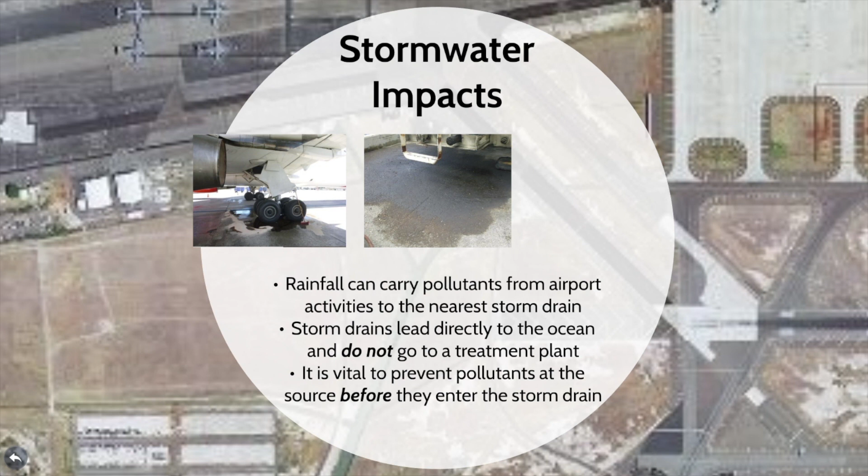Stormwater pollution can occur when rain comes into contact with pollutants on the ground. Pollutants may come from many sources, some of which include aircraft or vehicle leaks, material or chemical spills, lavatory waste, excess dirt and debris on a facility, or trash. As the stormwater sheet flows over the ground, these pollutants are picked up and have the potential to be carried away into the storm drain system.

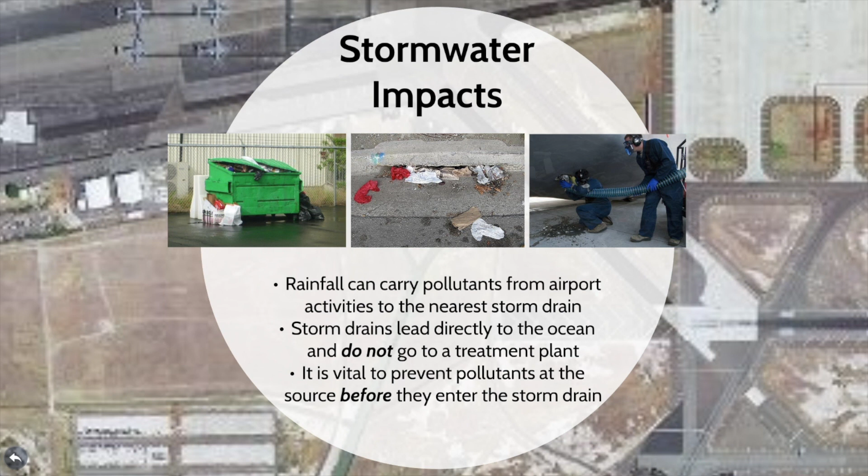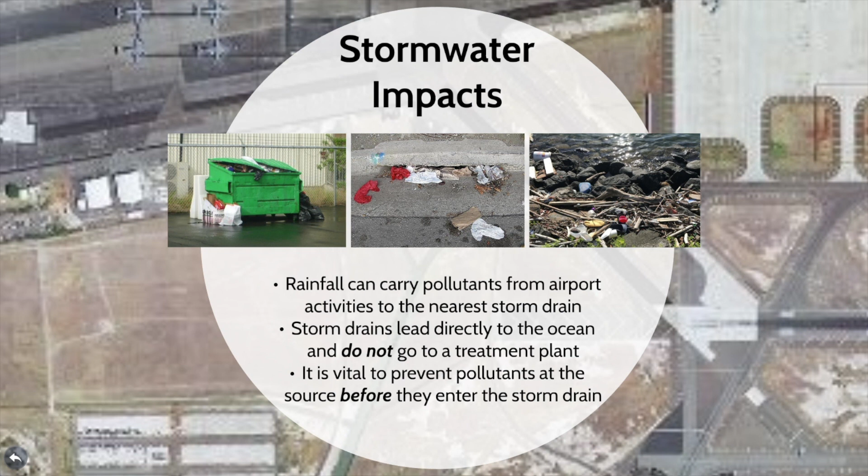Storm drain systems consist of various structures that include drain inlets, manholes, underground pipelines, and canals. All storm drain systems eventually lead and discharge directly into the ocean and do not go to a treatment plant as opposed to a sanitary sewer system. This stresses the importance of preventing pollutants at the source before they can enter the storm drain and potentially discharge into our waterways and oceans.

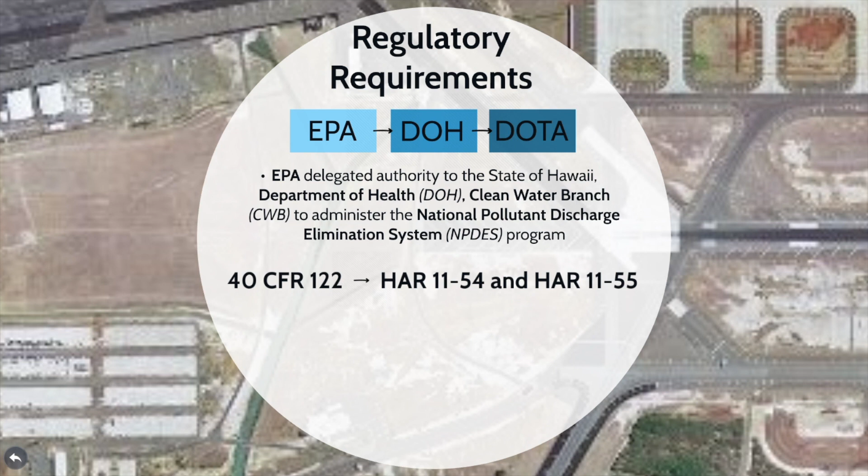The Environmental Protection Agency has delegated authority to the State of Hawaii Department of Health, the DOH, Clean Water Branch, for administering the National Pollutant Discharge Elimination System, or NPDES program. Specifically, the NPDES is a requirement of the Clean Water Act under Code of Federal Regulations, Title 40, Chapter 122, as well as Hawaii Administrative Rules 11-54 and 11-55. DOH issues NPDES permits to the DOTA that authorizes stormwater runoff discharges from the Small Municipal Storm Sewer Systems, or MS4.

An MS4 is a system designed or used to convey stormwater owned by state, city, or public entity that discharges to the waters of the U.S. The MS4 is not part of a sewage treatment plant or a combined sewer. Additionally, DOH issues NPDES permits for stormwater discharges related to industrial activities at base yard and tenant facilities.

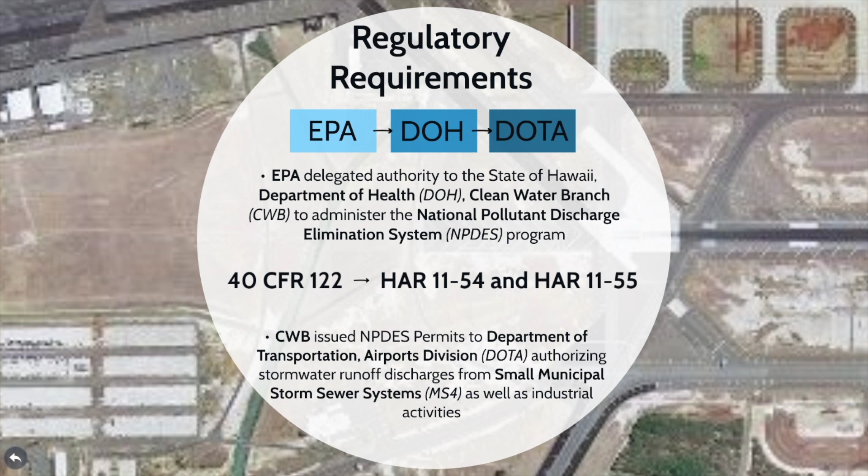The NPDES permit, discussed in the previous slide, governs airport operations and requirements for tenants. Implementation of BMPs are the primary tool that the airport uses to meet their requirements and must be implemented in accordance with the two small MS4 permits. The Daniel K. Inouye International Airport, also known as Honolulu International Airport, has an individual NPDES permit for its small MS4. One of the requirements of the NPDES permit is to develop a stormwater management program plan, or a SWMP. The HNL SWMP includes BMPs that are required to be implemented at the airport.

Kahului Airport, on the other hand, has a general permit for its small MS4. Kahului Airport also developed a SWMP, including BMPs that are required to be implemented at that airport. Additionally, Kahului, Lihue, and Molokai airports have general NPDES permits for industrial activities conducted at their base yards. BMPs must also be implemented in accordance with the Inspection and Enforcement Manual. For more information and links to these documents, please visit the airport website shown below.

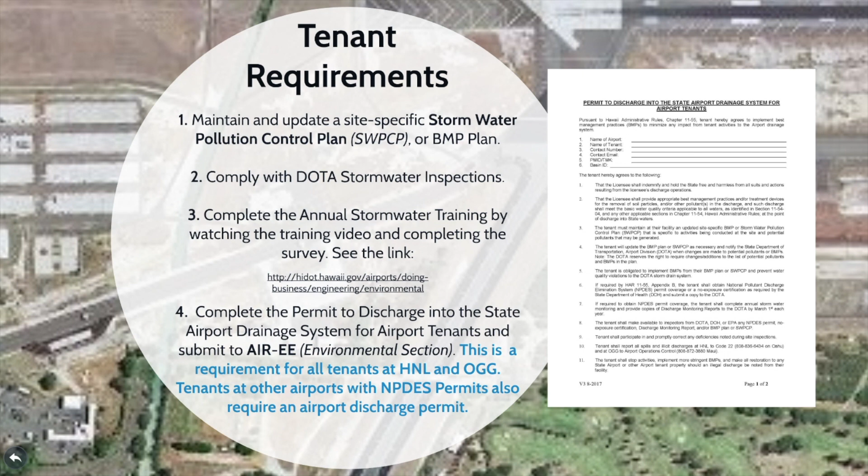In addition to implementing the BMPs, tenants are required to maintain and update a site-specific stormwater pollution control plan known as a SWPCP or a BMP plan on site, comply with the DOTA stormwater inspections that are conducted by the DOTA Environmental section and their consultants, complete the annual stormwater training by watching this training video and completing the survey and roster. Lastly, all tenants at the airport must complete the DOTA Stormwater Runoff Discharge Permit and submit to the DOTA Environmental section. An example of the DOTA discharge permit is here. Please keep in mind that these permits must be kept on file at all times.

Additional tenant requirements include knowing your Standard Industrial Classification Code, or SIC code. All facilities with regulated SIC codes that meet the definition of industrial are required to obtain an NPDES permit. You may verify your SIC codes at the link below. If your facility has a regulated SIC code, but the industrial activities and materials are not exposed to stormwater, you may qualify for a conditional no exposure exclusion, a CNEE. Tenants are required to comply with their NPDES permit requirements from DOH, including but not limited to developing and maintaining an SWPCP, conducting inspections, monitoring, etc.

Another requirement of the airport's NPDES permit is to implement BMPs at construction sites. Details of the airport's Environmental Construction Management Program may be found in SWMPP Section C. A separate training presentation is available at the airport website shown here.

If you are planning construction activities at your facility, you must comply with the following procedures. Obtain DOTA's approval for the construction project. A construction plan review is required to ensure that BMPs are adequate for the project, the proper permits have been obtained, and post-construction BMPs have been considered for projects over 1 acre.

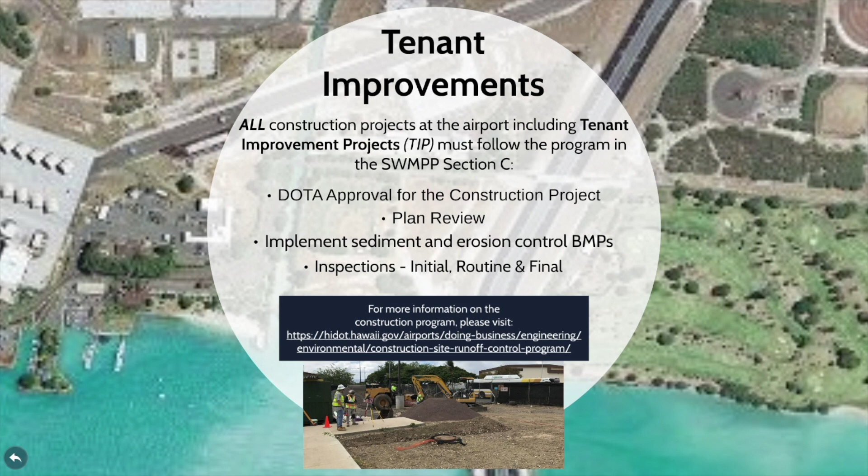Throughout the duration of the project, the DOTA Environmental Section will conduct routine inspections to ensure that BMPs are maintained. When violations are noted, DOTA can issue enforcement actions and increase the frequency of inspections. Consultation with the DOTA Environmental Section is required if construction is planned for your facility.

The most effective way to control pollutants is by implementing BMPs. According to the EPA, BMPs are schedules of activities, prohibitions of practices, maintenance procedures, and management practices used to prevent or reduce pollution of waters in the U.S.

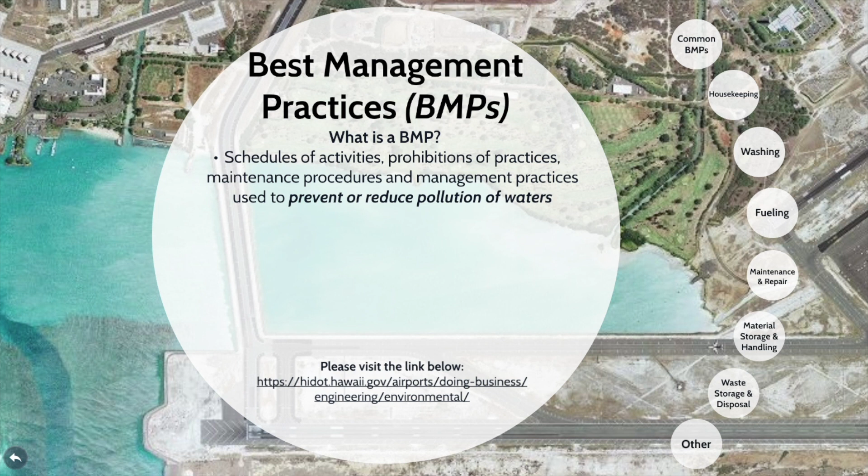Examples of BMPs include picking up trash, storing possible contaminants indoors and undercover, inspecting vehicles for leaks, and many more that will be the focus of today's training.

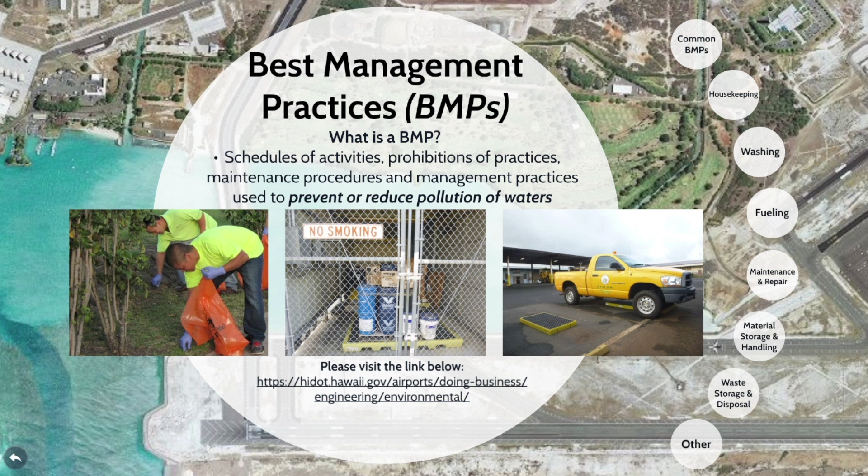The following references include BMPs for your operations. Please visit the DOTA website to review these documents.

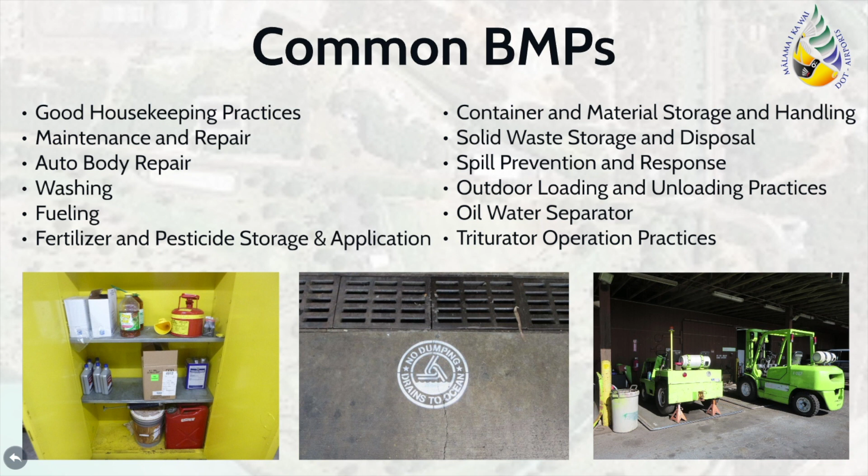The first thing to do when selecting BMPs is to consider all of the activities conducted at your facility that may affect the stormwater runoff. The BMPs applicable to airport activities generally fall under the categories listed.

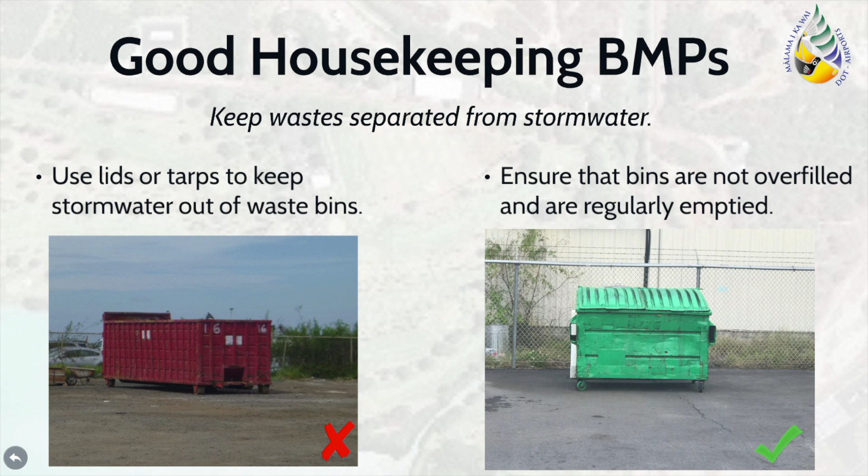The applicable BMP in these situations is to first regularly empty bins and dumpsters before they are overfilled, and to always cover dumpsters after they are done being used to prevent contact with rain.

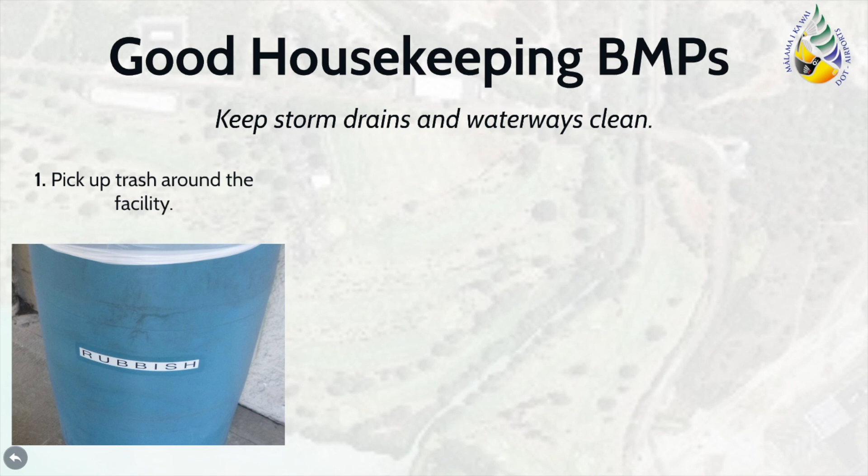Good housekeeping BMPs also ensure that facility storm drains and associated waterways are consistently kept clean. Conduct regular inspections of the facility and dispose of any trash and accumulated debris properly in the designated rubbish bins. If storm drains are particularly close to facility operations, such as maintenance or fueling, you may want to consider installing a treatment device.

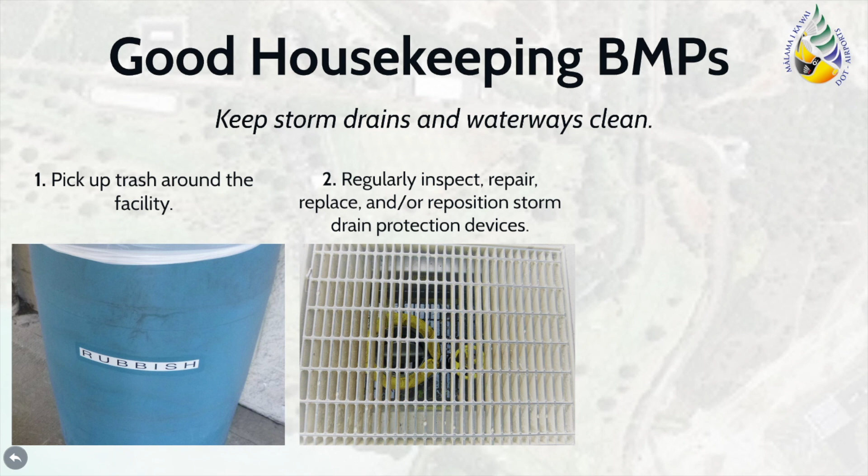Such as the safeguard pictured here. Ensure that if such devices are installed, that they are also properly maintained. Lastly, always ensure that trash and debris near storm drains or associated waterways are cleaned promptly before they enter the storm drainage system.

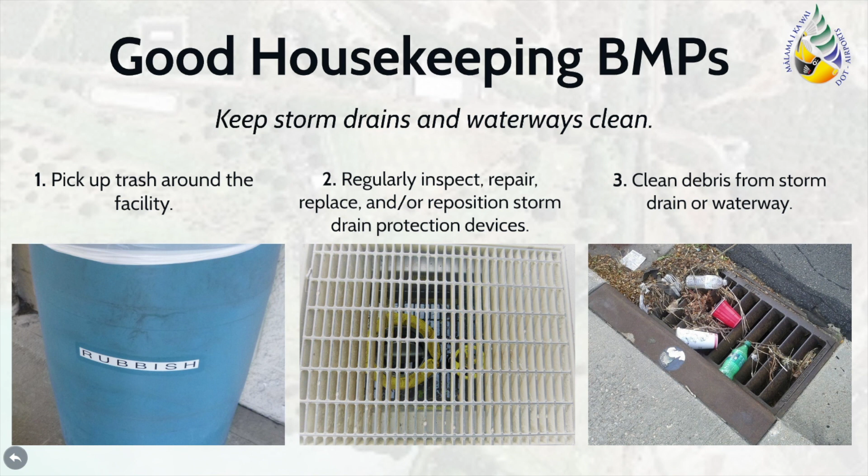As part of the regular facility cleanup mentioned previously, sediment and other debris should never be removed utilizing a water hose. Wash water from hosing down the facility may impact the receiving waters with potential pollutants and contaminants that they carry.

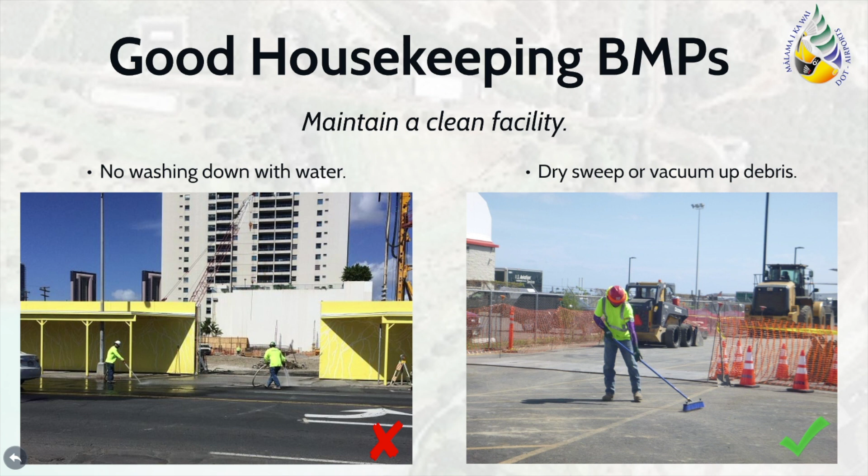Ensure that your facility is always swept or vacuumed, as the fine sediment can easily be carried away in the stormwater runoff and present a hazard to Hawaii's coral reef ecosystems. Good housekeeping BMPs vary based on activities that each facility conducts, so be proactive and consider how you can do your part in protecting our waters.

If you notice that your storm drains are filling with debris, ensure that they are regularly cleaned. Ensure that personnel and workers are knowledgeable of facility BMPs, as they will be asked during inspections whether they have had training and which BMPs they are responsible for implementing. Lastly, conduct your own inspections of BMPs to ensure that they are effective and best suit your facility's operations.

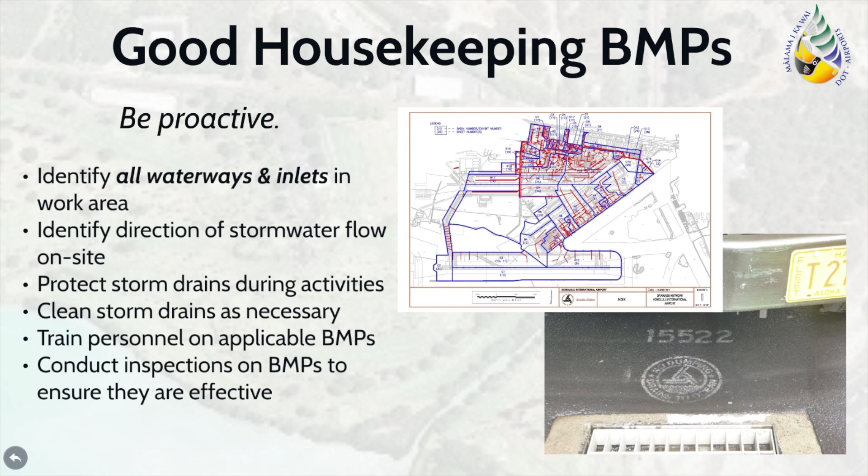This is the drainage network map of Honolulu International Airport that shows locations of inlets, manholes, pipes, and drainage canals. Please be sure to familiarize yourself with the drainage map at your airport and identify where the storm drains on your site lead to, as the waters flow untreated to our natural waterways and oceans.

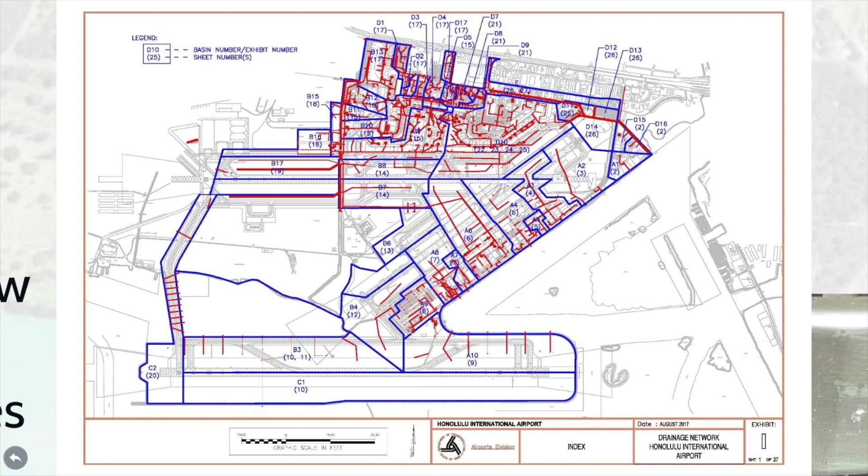The next category of BMPs are for vehicle, equipment, and aircraft washing. Washing activities should be conducted only at a designated wash rack that contains an oil-water separator or other treatment system where it will be treated prior to being discharged into the sanitary sewer. Washing of vehicles in undesignated areas is not permitted.

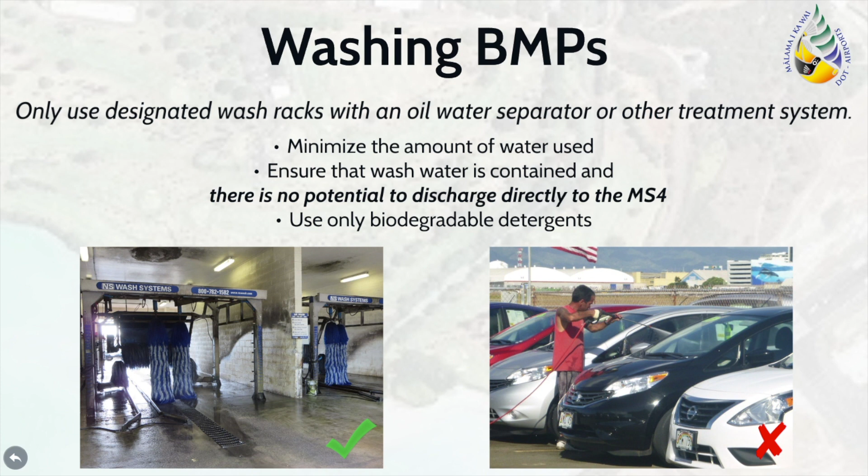When washing in a designated area, attempt to use as little water as possible to accomplish the task and ensure that it is contained within the wash rack. Any water that is not contained within the wash rack may be discharged to the storm drain system. Discharges often occur from wash racks when wet vehicles and equipment leave the contained washing area before allowing the equipment to dry prior to exiting. Please note that any discharge from washing activities into the MS4 is considered an illicit discharge, and DOTA will be required to escalate enforcement.

In areas where a designated wash rack is not available, DOTA approval is required to conduct washing. DOTA approval is required for the implementation of alternative BMPs to completely contain the wash water and dispose of it properly. The goal of these alternative BMPs is to prevent the wash water with potential pollutants such as soap, dirt, metals, and oils from entering the storm drain system.

This can be effectively achieved by containing the wash water. These systems may utilize a wet vac to completely contain and remove the wash water as the vehicle, equipment, or aircraft is being washed. Other methods include using the bucket and sponge method, which allows for the bulk of wash water to be contained inside the wash bucket. Once washing is complete, the contents of the wash bucket can be disposed of in the sanitary sewer.

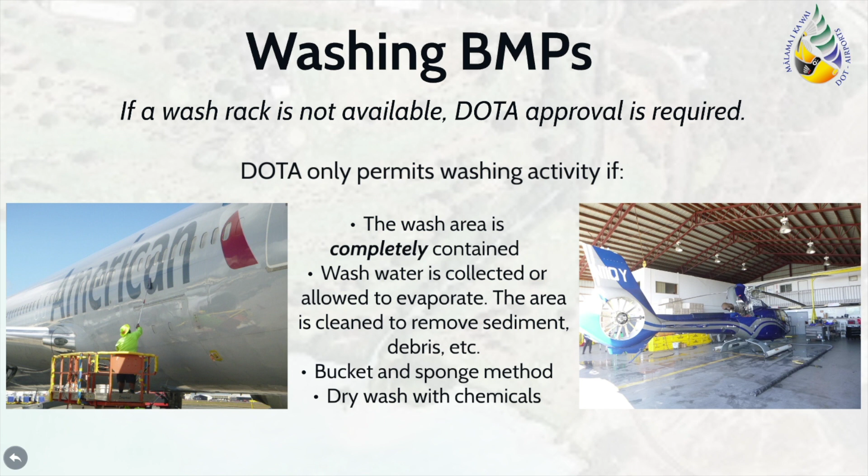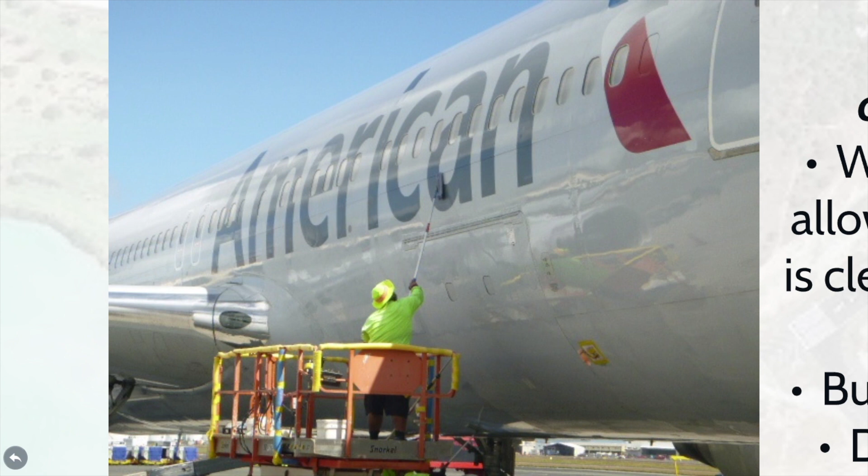Dry washing using a chemical and rag, as seen in this example, is used to wipe down when washing is required. This method does not involve water, which means that there is no risk of discharging to the storm drain. Here's an example of BMP implemented at a tenant space that allows for proper collection and disposal of the wash water.

Fueling BMPs consider regulations from the NPDES program, as well as the Spill Prevention Control and Countermeasures, or SPCC program. Tenants are required to develop and implement an SPCC plan when aggregate capacity of the above-ground oil storage exceeds 1,320 U.S. gallons, or when the buried storage capacity exceeds 42,000 U.S. gallons. Note that oil storage at your facility does not include containers less than 55 gallons.

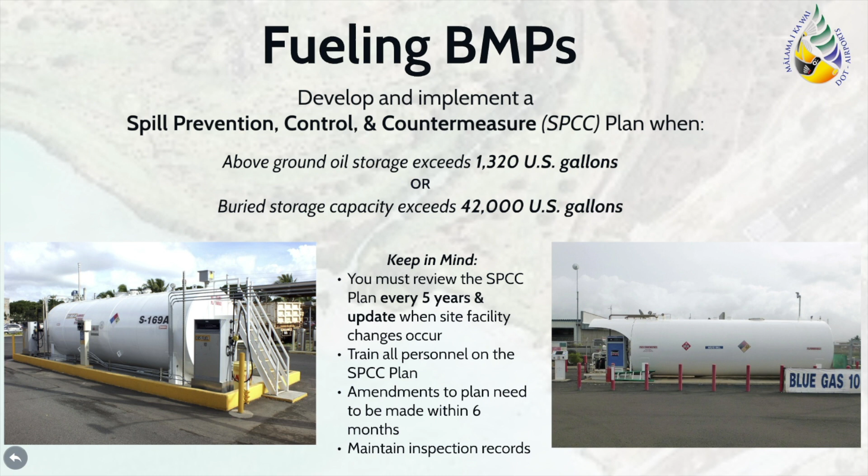Also keep in mind, if you have an SPCC plan, it must be reviewed every 5 years and updated when changes at your facility occur, such as changes in personnel, tank capacity, or site layout. All personnel must be trained on the SPCC plan according to the frequency written in the plan. Amendments to the plan must be made within 6 months of when such changes occur. In addition, inspectors will review to ensure that the routine inspection records of the tanks are maintained on site for a minimum of 3 years, or in accordance with the SPCC plan.

Operational fueling BMPs that should be implemented include inspecting hoses and nozzles for any cracks prior to use, thereby preventing releases. Those involved in filling operations should also stay vigilant in the event that any releases are readily and correctly identified. Ensure that the tank is not topped off, as this can increase the chances of oil spilling onto the ground and becoming a potential pollutant.

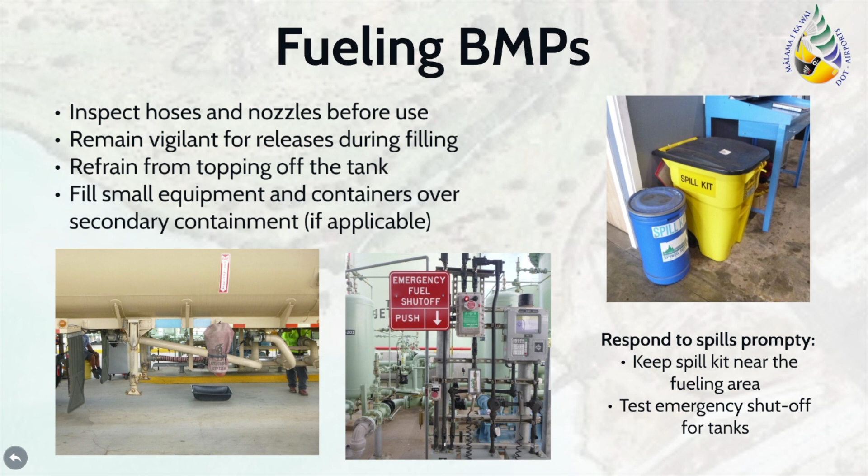It is important to respond to any spills that may occur promptly. It is a good rule of thumb to keep spill kits near the fueling area and to routinely test the emergency shutoff for tanks.

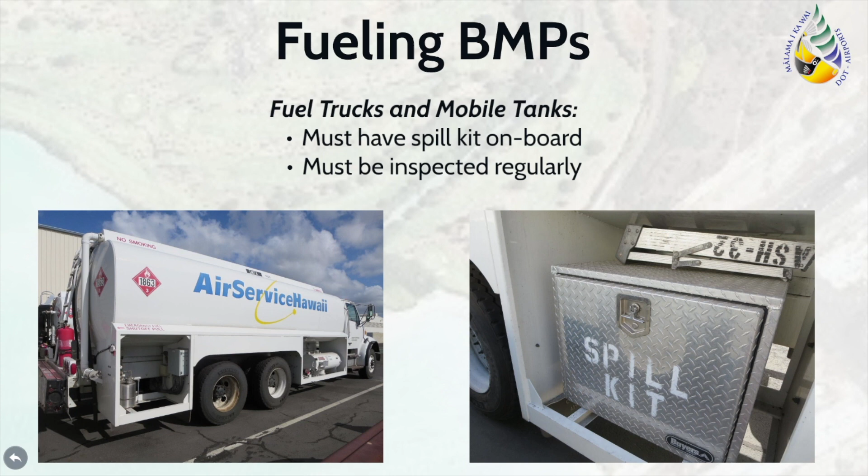Fuel trucks are regularly used at the airport for fueling aircraft. These trucks must have a spill kit on board, and personnel must be well trained in responding to spills that may occur from these activities.

This next category of BMPs is specifically for auto body shops. There are many potential contaminants associated with auto body work, such as sanding dust, paint, VOCs, etc. Therefore, the first BMP is to ensure that these activities are conducted indoors or undercover so that these potential pollutants are not impacting the stormwater runoff.

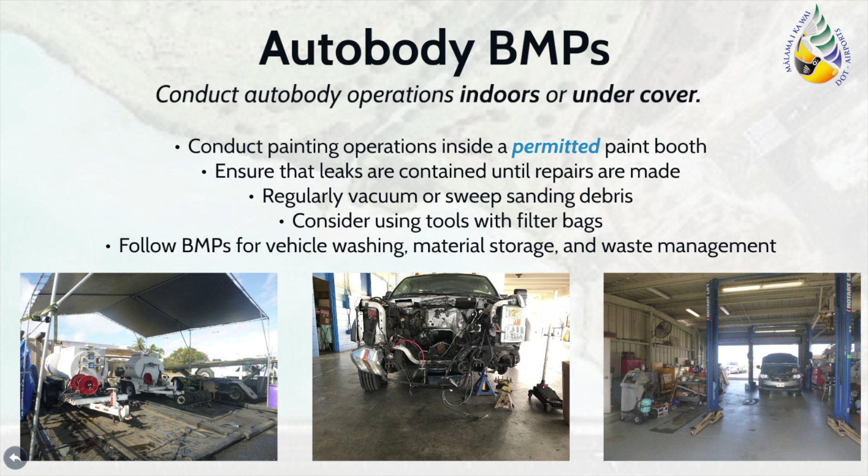Often, vehicles that require auto body work may be damaged, which is why it is vital to inspect the vehicle first and place drip pans beneath the vehicle to capture leaks until repairs are completed. A particular threat to stormwater from auto body work is the generation of dust from sanding operations. Due to its small size, the sanding dust is easily carried away, so be sure to regularly sweep and vacuum.

This BMP applies to maintenance and repair of aircraft, vehicles, and equipment. It is important to keep equipment in good condition so that equipment fluids are not released into the environment. Conduct regular aircraft, vehicle, and equipment inspections to check for leaks and repair as necessary.

Keep all maintenance records on site. If a leak cannot be repaired immediately, use a drip pan of sufficient capacity to contain the leaking fluid and later dispose of it properly. It is required that drip pans, especially those stored outdoors, are regularly cleaned to empty the contents and any rainwater accumulation. Please note that leaking aircraft, vehicles, and equipment are not allowed to be parked overnight on airport common use areas without prior approval from the airport's district manager and appropriate drainage controls.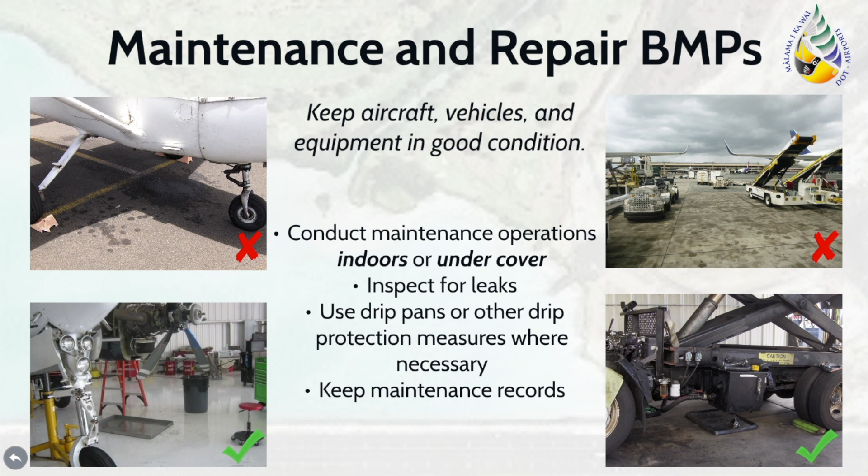Salvage equipment includes those items that are no longer working and need to be disposed of. When storing salvage equipment, ensure that the following proper BMPs are implemented. Remove fluids and batteries so that releases will not occur to the environment. Additionally, if vehicles or equipment begin to rust, dispose or place in a covered area that will not impact stormwater runoff.

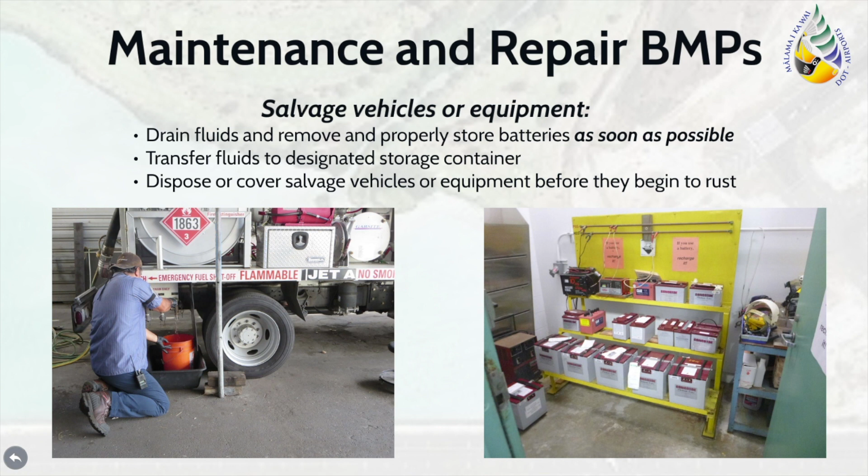All maintenance activities are required to be conducted in their designated areas where they will not have an impact on the stormwater runoff. Maintenance areas should also be located away from storm drains so that responders have the opportunity to clean spills before it discharges to the drainage system. Ensure that fluids removed from the vehicles and equipment are transferred to a designated storage container promptly. The storage containers must be labeled, closed, and placed within secondary containment measures.

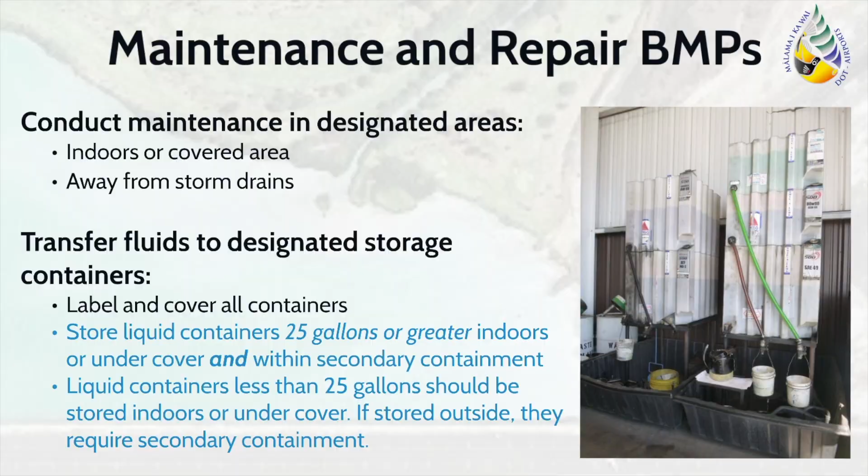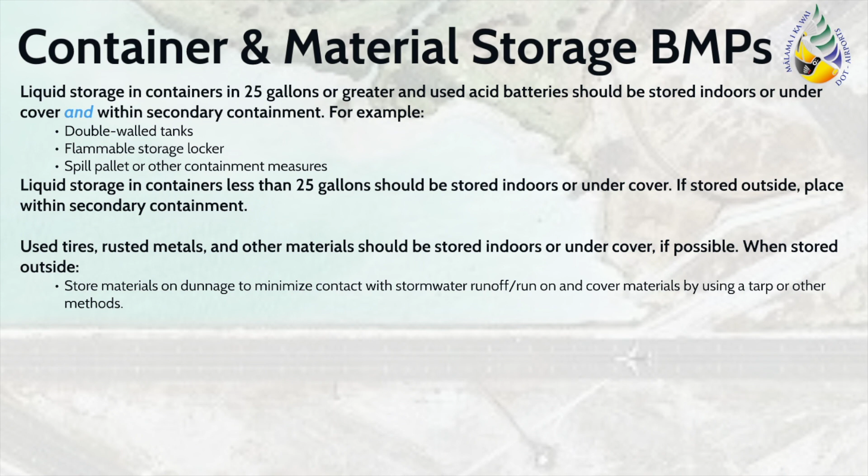Materials stored at your facility may impact stormwater runoff and therefore are required to be kept indoors or in a covered area. Keep in mind that secondary containment is required for liquids and batteries. Examples of secondary containment measures include double-walled tanks, flammable storage lockers, and spill pallets or other containment measures. If materials must be stored outdoors, protect them from stormwater runoff by placing them on dunnage and by also covering the materials using tarps.

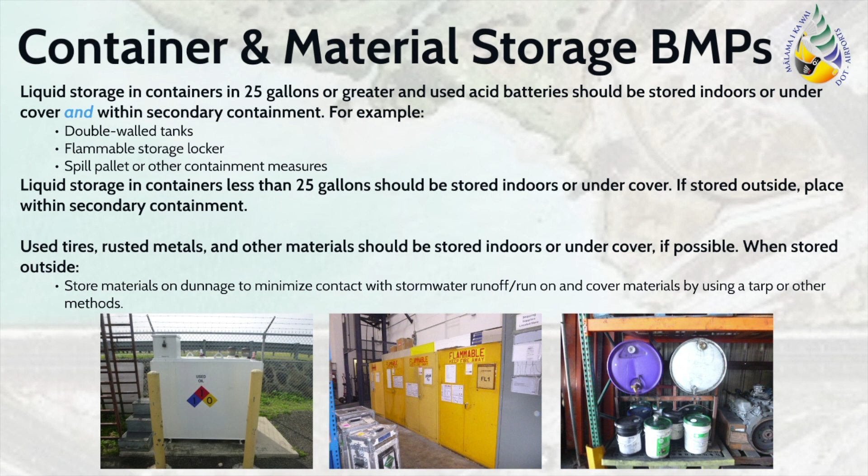The secondary containment for materials must have the capacity to hold the volume of the largest container plus freeboard. Ensure that secondary containment measures are clear of accumulated rainwater or product, since a partially filled secondary containment measure can no longer contain releases. If rainwater accumulates within the containment, it may only be discharged provided that there are no contaminants present. For example, the stormwater in the spill pallet must not have a sheen.

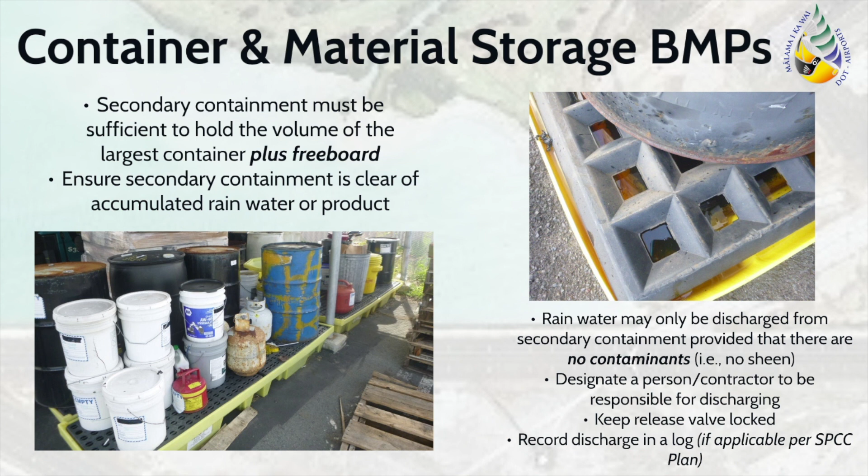Always designate a person to empty the spill pallet, in which the discharge must then be recorded. Please note that if any product is present in the secondary containment, it must not be discharged and is required to be cleaned according to the spill response procedures.

Other material storage BMPs include conducting regular inspections of material storage areas. Ensure that all containers are still in good condition and compatible with the materials stored. Broken or deteriorating containers must be replaced.

Please note that all chemical containers must also be labeled, even if the container is empty. Empty containers must have an empty label. In the picture shown, each of these 55-gallon drums are clearly marked with empty labels.

It is also important to keep and maintain a list of chemicals at the facility, along with the safety data sheets, or SDS. Keeping an inventory will assist in preventing employees from over-purchasing items, and also assist in ensuring that items are utilized prior to their expiration date. Both of these practices will reduce the generation of wastes from material storage. Facilities should also consider alternatives for hazardous chemicals, such as biodegradable solvents.

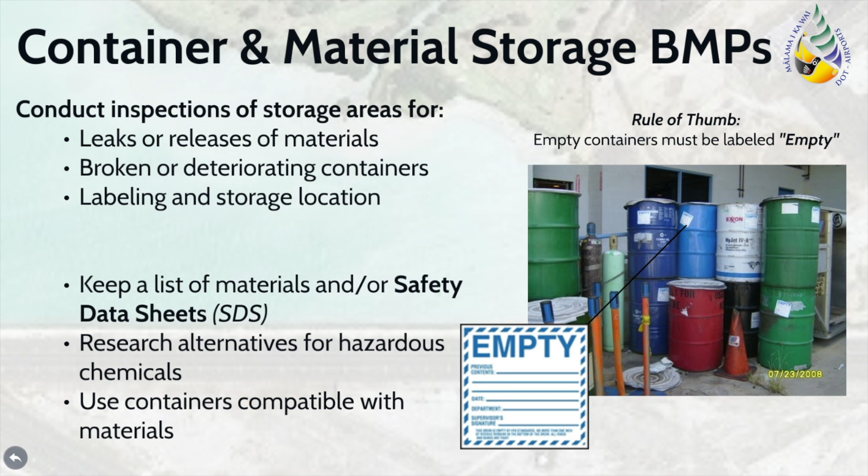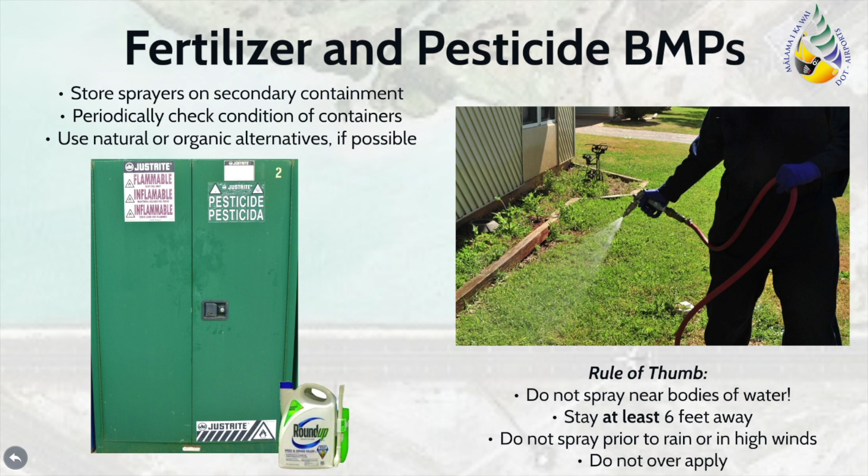Solid waste storage and disposal is a broad topic and may be enforced under many additional regulations other than those described in the NPDES program. Tenants should be aware of those regulations and always follow the more stringent implementation of the regulations if there is a conflict. The list provided here are general BMPs that may be applied to solid waste.

Consider using the entire product prior to disposal. If the container is empty, then there is a reduced chance that it would impact the stormwater runoff. Please keep in mind that the Resource Conservation and Recovery Act, or RCRA's, definition of empty, applicable for containers less than 110 gallons, is less than 1 inch of material remaining.

In addition, it is vital to retain the original label and/or safety data sheet for disposal information, since it will provide specific information about storage and disposal procedures. Also, consider reducing material purchases to only those things that are required for the task, so that fewer potential wastes are generated when excess materials are not used.

Recycle items such as scrap metal whenever it is possible. Inspect waste storage areas to look for releases and to ensure that waste containers are in good condition, closed, and properly labeled.

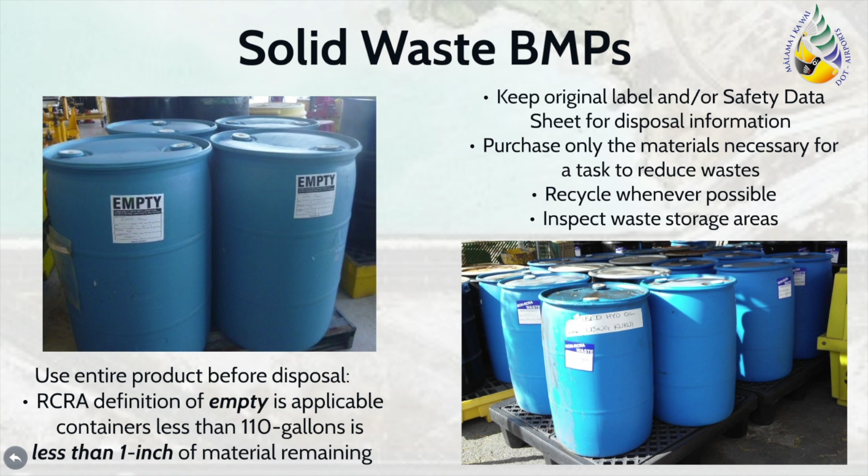Hazardous wastes are another waste category regulated under RCRA. First, determine if the wastes generated at your facility are hazardous, which may be done by referring to 40 CFR 261 for the definition of hazardous waste.

If hazardous wastes are stored at your facility, ensure that the wastes are not mixed. Best management practices for storing hazardous waste include keeping them indoors or under cover, ensuring they are stored within secondary containment if liquid, and labeling them properly with the words hazardous waste and the accumulation start date.

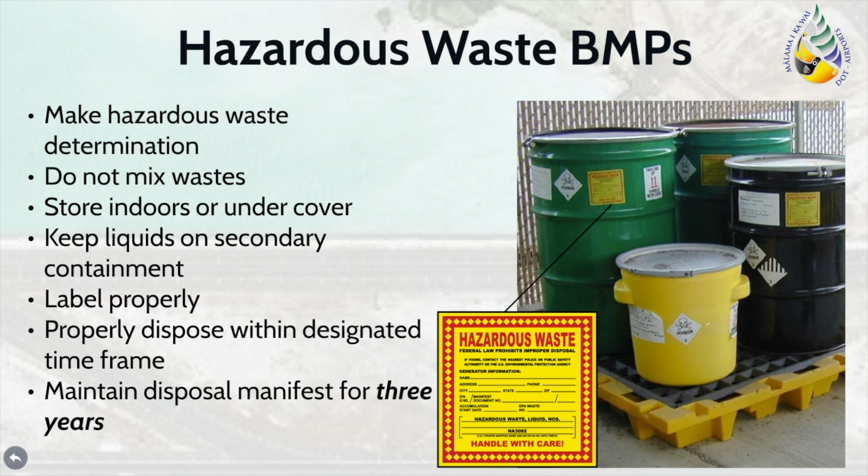Ensure that wastes are disposed within the appropriate timeframes, depending upon the facility generator size, and maintain the disposal manifest for 3 years. Airport inspectors will ask to see copies of these manifests to verify proper waste disposal.

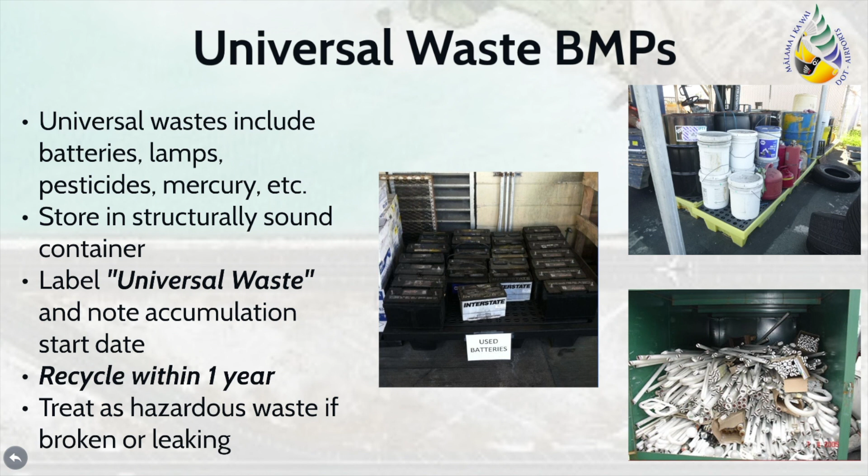Universal waste includes hazardous waste items such as batteries, lamps, pesticides, and any mercury-containing equipment. If any of these universal waste items are stored at your facility, they must be placed in a structurally sound container and labeled with the words universal waste, including the accumulation start date.

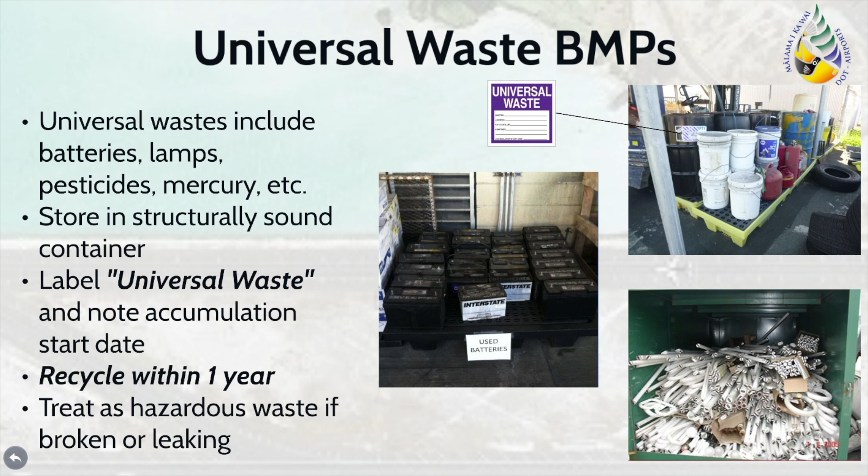These items must be recycled within 1 year, and disposal documentation should be retained. Please note that broken lamps or leaking batteries must be handled as hazardous waste.

Many facilities are equipped with oil-water separators to separate oils from wastewater. Tenants with oil-water separators must maintain an industrial wastewater discharge permit, or IWDP, on site that is issued by the City and County of Honolulu.

The oil-water separator must also be inspected at least semi-annually and cleaned as needed. Oil-water separator maintenance logs must be kept on site and will be reviewed by airport inspectors.

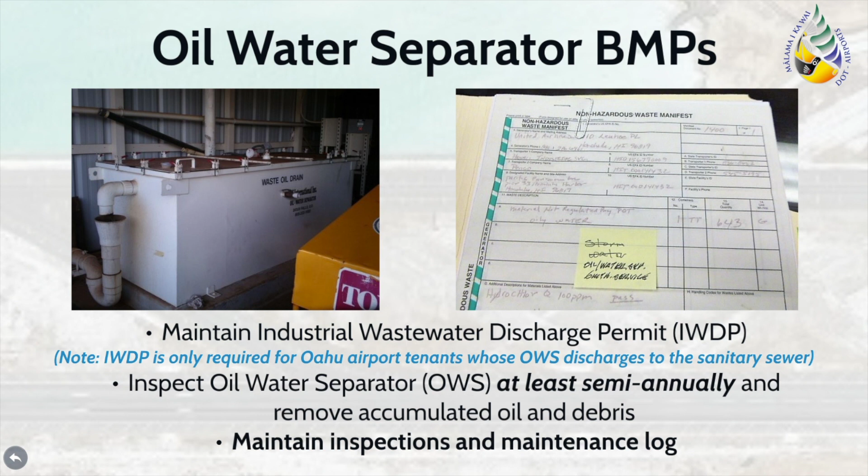Facilities that engage in the servicing of aircraft may also need to implement triturator usage best management practices. Please note that there is a separate triturator training that must be provided to lavatory waste operators. Contact the airport environmental health specialist for a copy of this required training.

In general, when handling lavatory waste, operators should ensure that hose connections are secured and not leaking. Operators should be present during the offloading process to respond to any release that may occur.

While at the triturator, operators are not permitted to wash the exterior of the truck. The triturators are not designed to contain the wash water, and it may run off to the storm drain system.

If a spill does occur while at the triturator, as seen in the picture on the right, ensure that it is cleaned promptly. Spills may be cleaned using a disinfectant, rags, and/or a broom. Please ensure that kitty litter is not used to clean lavatory waste spills, as it may damage the triturator system.

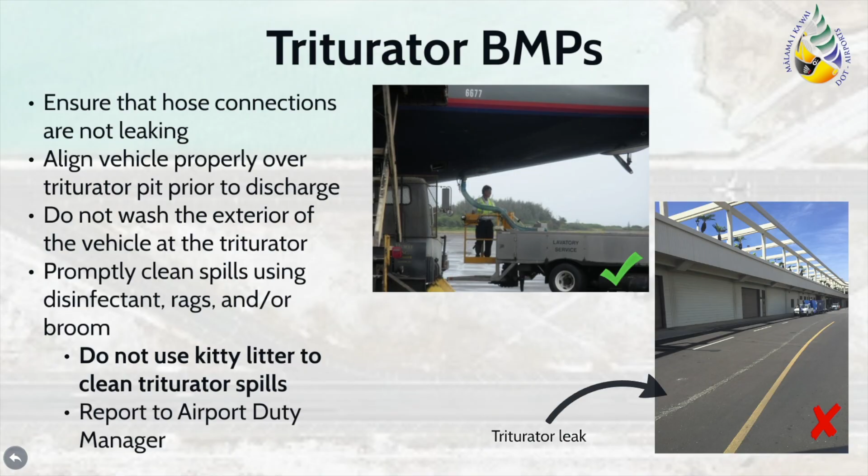Spills are a common way that pollutants are discharged from a facility to the storm drain system. Employees at your facility should be well trained in preventing and responding to spills that may occur, as well as protecting the storm drain system.

Consider running a practice scenario or drill to ensure that employees are prepared for spill response. Additionally, every facility must have a spill kit. The spill kit should contain personal protective equipment, or PPE, for employees to wear while cleaning the spill.

The spill kit should include gloves and goggles, a plastic bag or other container for disposal, non-sparking tools such as a broom, and some type of absorbent. The spill kit should be labeled and located near an area of the facility where spills are likely to occur, such as the fueling or material storage area.

Post emergency phone numbers for employees. Every facility should have a designated person who will ensure that spills are properly cleaned and make the necessary notifications. All spills, no matter the size, should be reported to the airport duty manager.

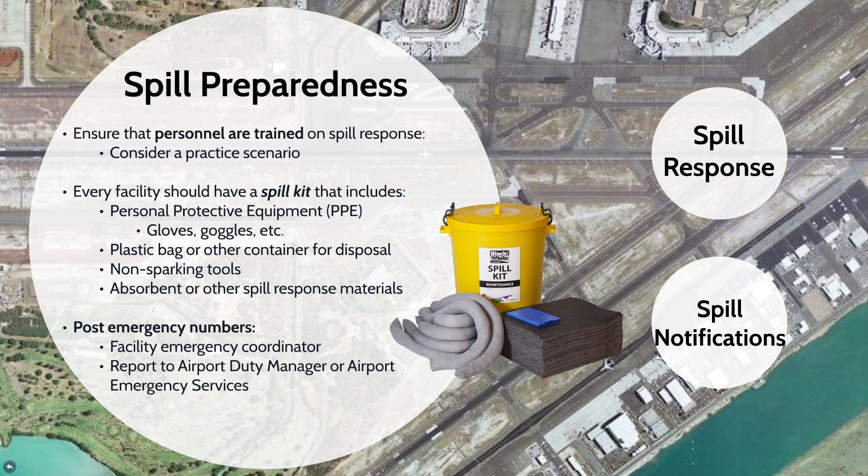When a spill first occurs at your facility, begin spill response by stopping your work and shutting down your equipment. Attempt to determine the source of the spill.

If it is from a drum, you may be able to patch the drum or transfer the drum's contents to stop the flow of the spill. If the spill is coming from larger equipment, such as a fuel tank, you may be able to hit the emergency shutoff button to stop the flow of the spill.

Additionally, if the spill is a petroleum product, shutting off vehicle engines will prevent ignition of the material. Alert those in the immediate vicinity of the spill so that they do not enter the spill area and track the material. Next, determine whether the spill is within your means to clean.

If you have sufficient resources, such as trained personnel and absorbent, then begin the spill cleanup. If not, ensure that a spill response contractor is promptly notified and storm drains are protected until cleanup is completed. Evacuate if necessary.

When cleaning spills, begin by accessing your facility's spill kit and don the appropriate PPE. Contain the perimeter of the spill to limit the area affected using berms or absorbents. Also, ensure that any nearby storm drains or other waterways are protected.

Allow approximately 15 minutes for the absorbent to bind to the spilled product. Ensure that the absorbent is not left for an extended period of time because it may be blown in the wind or carried away during a storm event. After the material has absorbed, sweep the area and dispose of the waste properly.

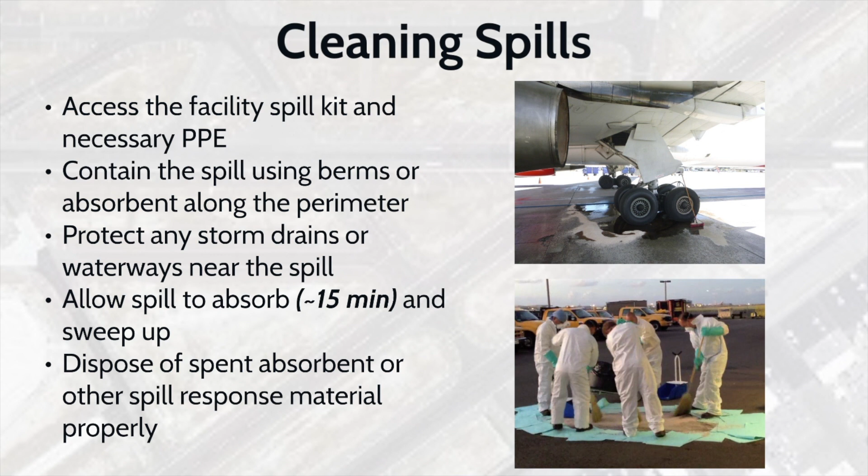For airports on Oahu, spent absorbent from petroleum spills may be double-bagged and placed in the regular trash to be burned for electricity. Neighbor islands may have to treat the spent absorbent as hazardous waste, depending on their landfill rules.

Additional notifications may be required for reportable quantity spills. For petroleum spills, the reportable quantity is 25 gallons or more, spills not cleaned within 72 hours, and/or spills that enter a surface water body.

In these cases, you will need to notify the National Response Center, the DOH Hazard Evaluation and Emergency Response (HEER) office, and the DOH Clean Water Branch. They will also require a follow-up written report detailing how the spill was cleaned.

Another component of the NPDES program is the identification of illicit discharges. Illicit discharge is defined by the EPA under 40 CFR 122 as any discharge to an MS4 that is not composed entirely of stormwater except permitted by an NPDES permit.

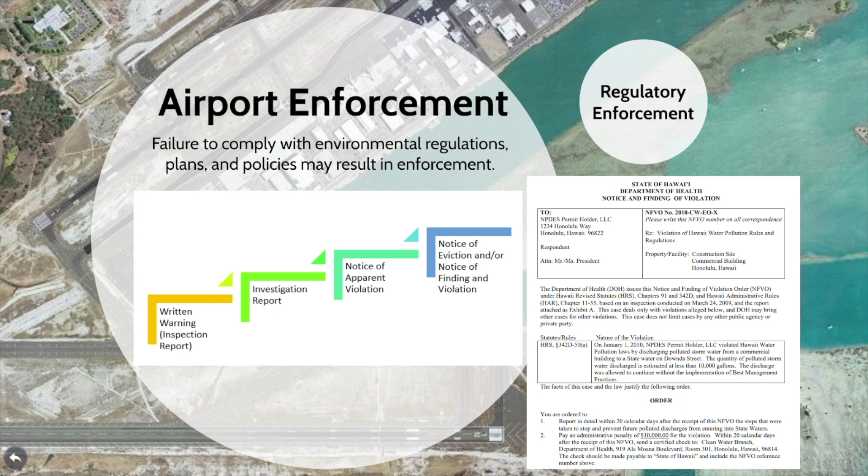If the item is not corrected within the agreed-upon time period, then enforcement efforts may increase to an investigation report and then to a Notice of Apparent Violation, or NAV. After the NAV is issued, then the DOTA can escalate enforcement under the lease agreement, which could result in a notice of eviction and/or, under the HRS 342D with DOH Clean Water Branch, using a Notice of Finding and Violation, or NFVO.

The EPA or DOH can conduct inspection and enforcement actions that result in fines. All fines are accrued on a per-offense, per-day schedule, meaning that if you have one violation but do not correct that violation for 1 year, the fine you receive may be multiplied by 365.

The DOH has 2 different categories of fines that include civil and administrative. Civil fines can range up to $25,000 per offense. Administrative fines are further broken down into categories of negligent, knowing, and knowing endangerment, with fines ranging from $2,500 to $250,000. In particular, an organization can also be fined up to $1 million.

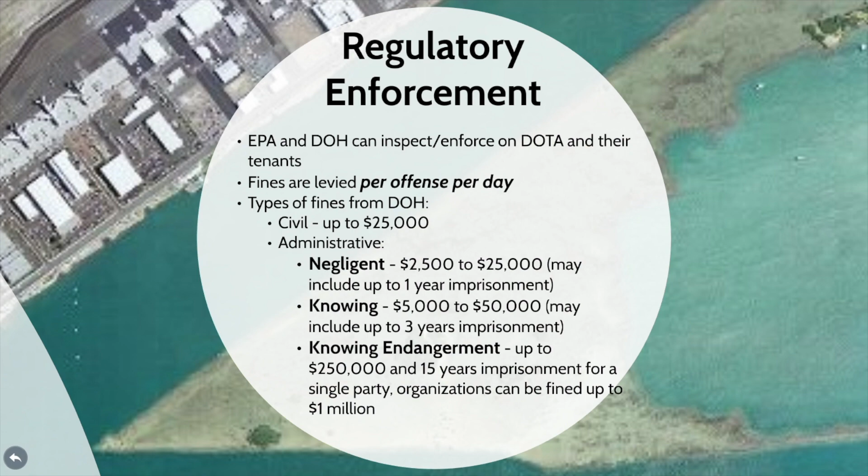As you can see, our daily activities at the airport have the ability to greatly impact the environment, whether we are DOTA personnel, inspectors, tenants, contractors, or even visitors. Implementing stormwater BMPs at the airports allow us to comply with regulatory requirements, avoid enforcements or fines, and most importantly, protect our water, which we all enjoy and rely on.

Besides the regulations and fines, we all have a responsibility to protect our water because we live in beautiful Hawaii and want to keep it that way. Some of our favorite pastimes most likely include activities like swimming, surfing, fishing, snorkeling, or just enjoying our beautiful beaches and all they have to offer.

For our local economy that is primarily supported by tourism and other industries that include fishing, tourists visit Hawaii for our pristine beaches, coral reefs, and endemic species only found here. It is our job to protect our ocean, as well as the aquatic life and ecosystems within it for generations to come.